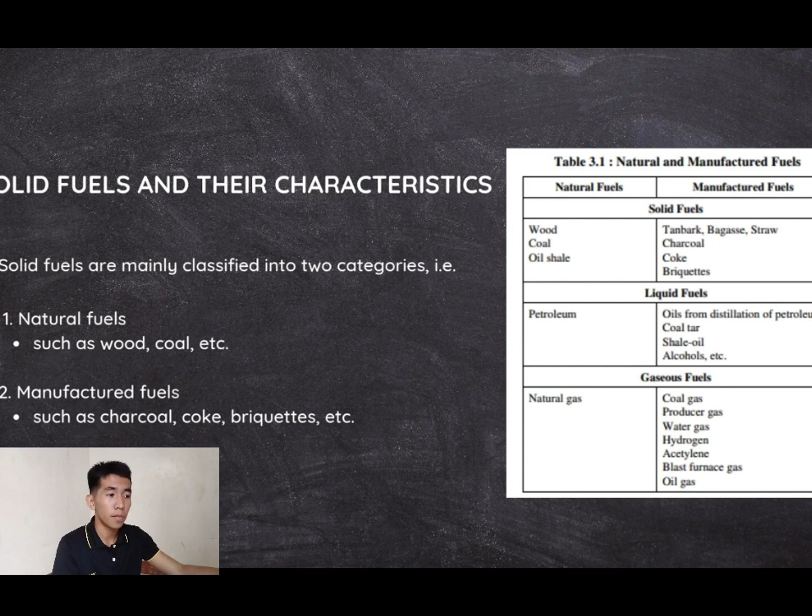This table summarizes the classification of solid fuels based on their origin and physical state. It clearly distinguishes between natural and manufactured fuels and further categorizes them into solid, liquid, and gaseous forms, with examples for each category.

Next are the various advantages and disadvantages of solid fuels. The advantages are: they are easy to transport, convenient to store without risk of spontaneous explosion, their cost of production is low, and they possess a moderate ignition temperature.

In disadvantages: their ash content is high, a large proportion of heat is wasted, they burn with clinker formation, their combustion operation cannot be controlled easily, and their cost of handling is high.

Next, wood and its characteristics. The most commonly used and easily obtainable solid fuel is wood, because wood is very renewable and easy to use.

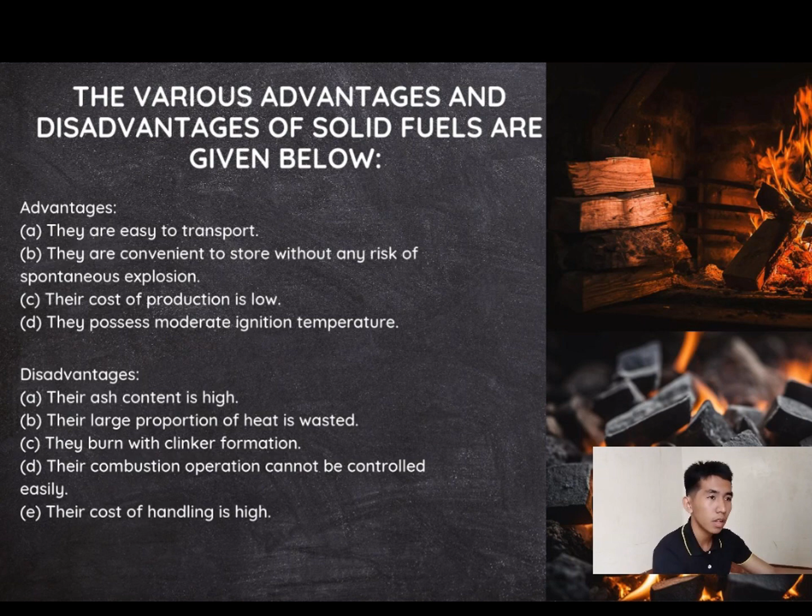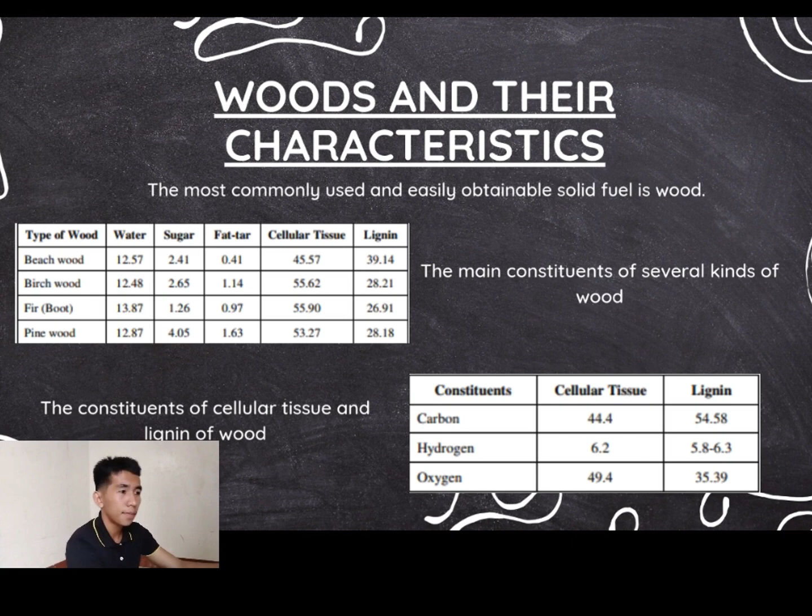This slide presents data on the composition of different types of wood, focusing on water, sugar, fat tar, cellular tissue, and lignin content. It is presented in two tables. In table 1, the composition of various wood types.

This table shows the percentage composition of different constituents in 4 types of wood: beechwood, birchwood, firwood, and pine wood.

In table 2, constituents of cellular tissues and lignin. This table breaks down the main constituents—carbon, hydrogen, and oxygen—within the cellular tissue and lignin components of wood.

It reveals variation in the composition of different wood types. Pine wood, for instance, shows a higher sugar and fat tar content compared to birchwood. The cellular tissue and lignin components are primarily composed of carbon, hydrogen, and oxygen, with lignin having a significantly higher carbon content than cellular tissue. This is useful for understanding the properties and potential applications of different wood types, particularly in relation to their use as fuel.

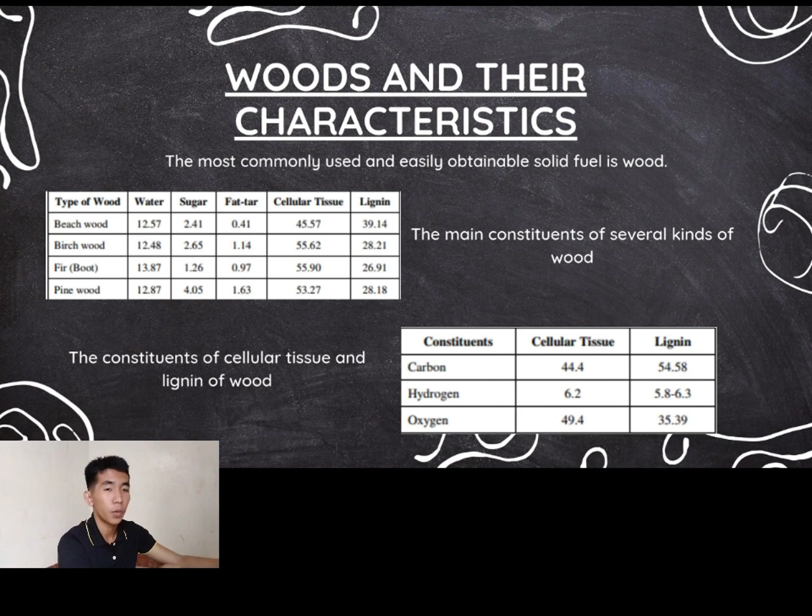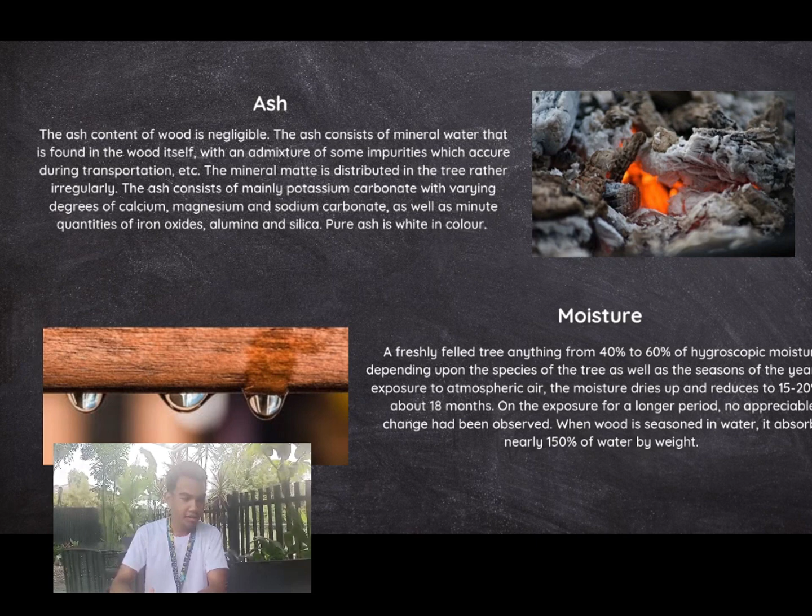Ash. The ash content of wood is negligible. The ash consists of mineral matter that is found in the wood itself, with the admixture of some impurities occurring during transportation, etc. The mineral matter is distributed in the tree rather irregularly.

The ash contains sodium carbonate. It consists mainly of potassium carbonate with varying degrees of calcium, magnesium and sodium carbonate, as well as minute quantities of iron oxide, alumina, and silica. Pure ash is white in color.

Moisture. A freshly felled tree has anything from 40% to 60% of hygroscopic moisture, depending upon the species of the tree as well as the season of the year. On exposure to atmospheric air, the moisture is reduced to 15 to 20% in about 18 months.

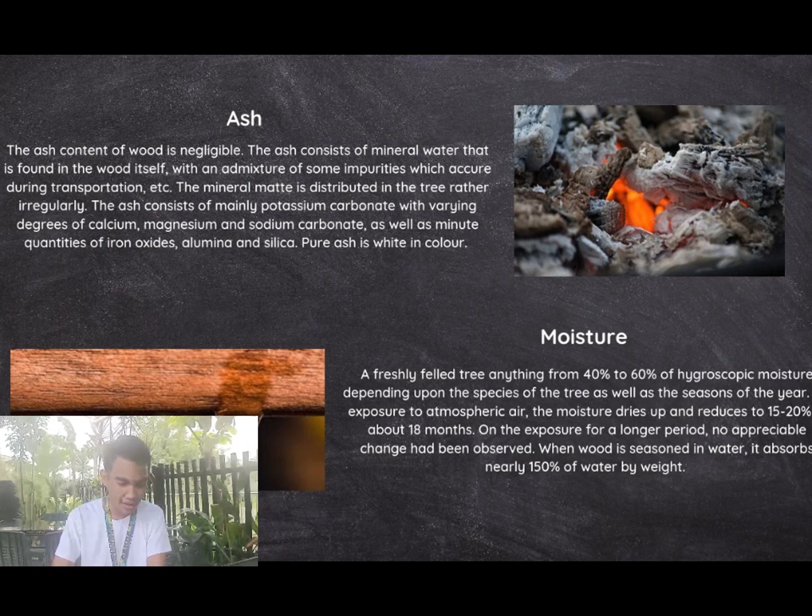When wood is seasoned in water, it absorbs nearly 150% of water by weight.

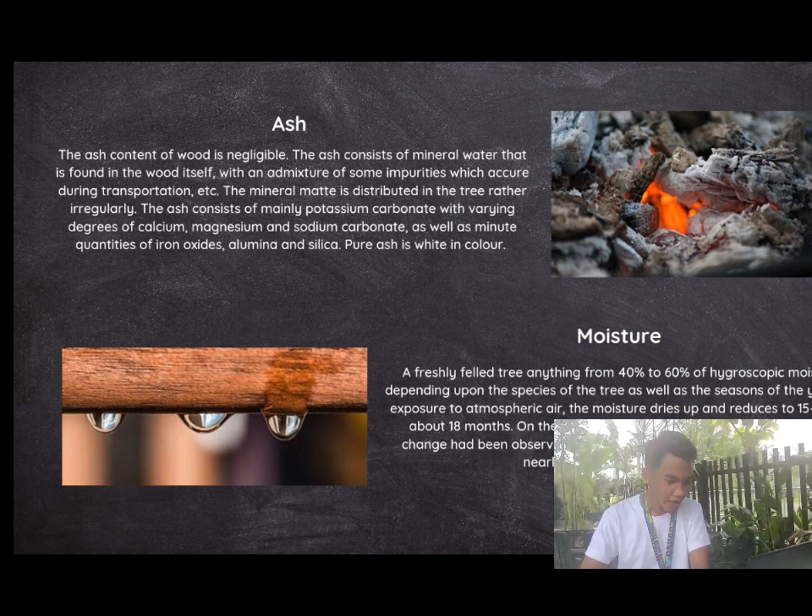Characteristics of flames: the nature of flames depends on the content of wood. Pine and birch contain more tar and resin, burning with a thick and bright flame, while aspen and alder burn with a dim, transparent flame. The light of the flame also depends on the tar content.

Combustion characteristics: the lighter the wood, the more intensely it burns, with a long flame. This is because air penetrates easily throughout the whole piece during combustion. If the wood is heavy and hard, penetration of air remains difficult, and a concentrated flame results, with more heat developing at the point of burning.

Liquid fuels and their characteristics. Liquid fuels can be classified as natural or crude oil, and artificial or manufactured oils.

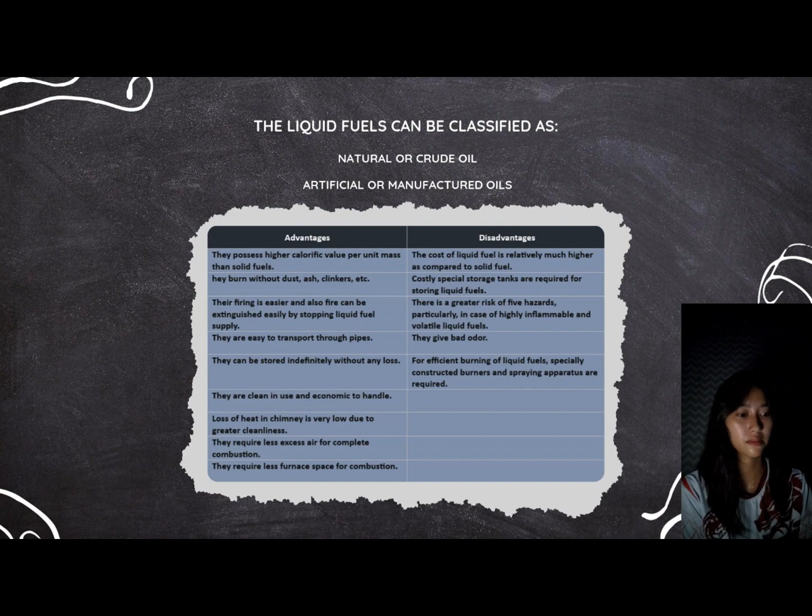Manufactured liquid fuels and their characteristics. Manufactured liquid fuels include gasoline, diesel oil, kerosene, heavy oil, naphtha, lubricating oils, etc. These are obtained mostly by fractional distillation of crude petroleum or liquefaction of coal.

The diesel fuel or gas oil is obtained between 250 to 320°C during the fractional distillation of crude petroleum. This oil generally contains 85% carbon and 12% hydrogen. Its calorific value is about 11,000 kcal per kilogram. The suitability of a diesel fuel is determined by its cetane value.

Diesel fuels consist of longer hydrocarbons and have low values of ash, sediment, water, and sulfur content. The main characteristic of a diesel fuel is that it should easily ignite below compression temperature. The hydrocarbon molecules in a diesel fuel should be, as far as possible, straight chain ones, with a minimum admixture of aromatic and side chain hydrocarbon molecules.

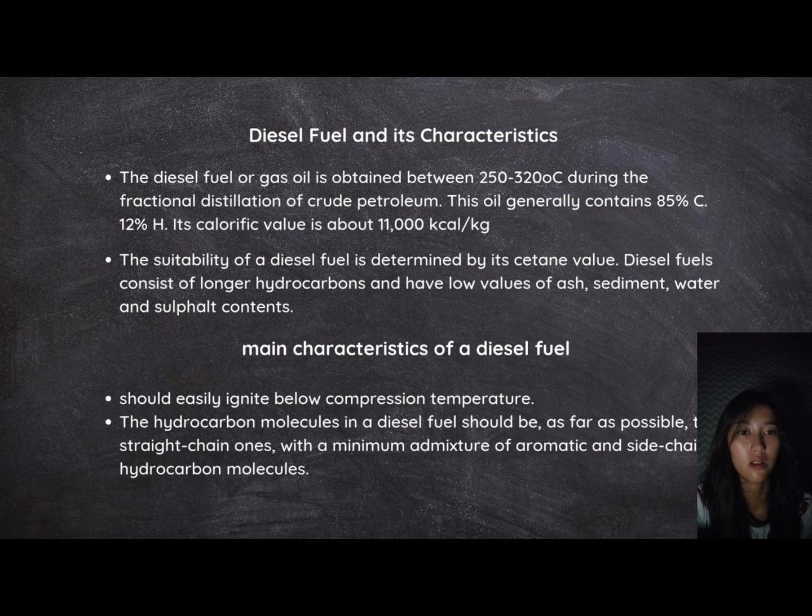Kerosene oil and its characteristics. Kerosene oil is obtained between 180 to 250°C during fractional distillation of crude petroleum. It is used as an illuminant, jet engine fuel, tractor fuel, and for preparing laboratory gas. Used in domestic appliances, it is always vaporized before combustion. By using a fair excess of air, it burns with a smokeless blue flame.

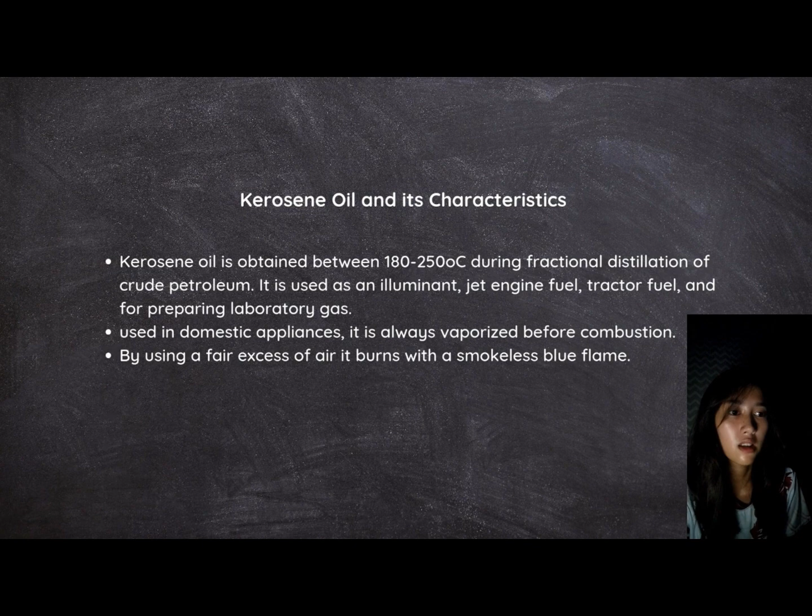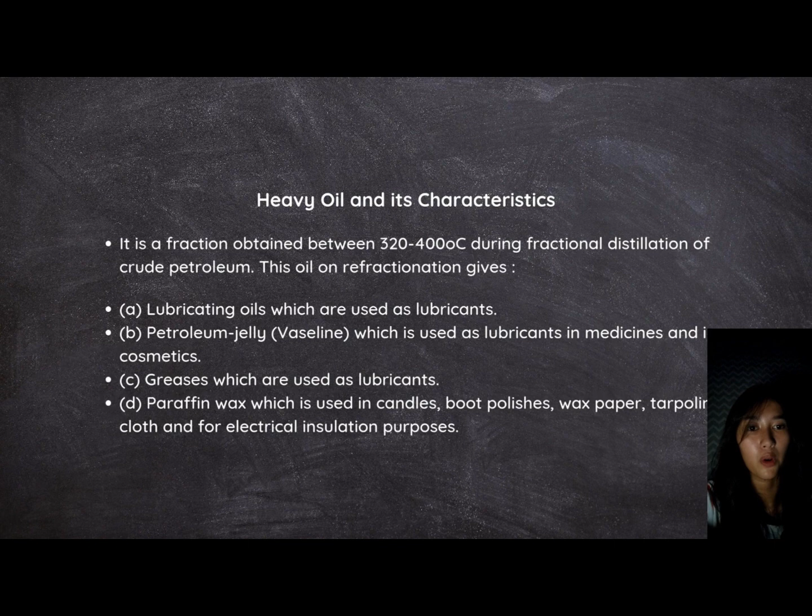Heavy oil and characteristics. It is a fraction obtained between 320 to 400°C during fractional distillation of crude petroleum. This oil, on refractionation, gives lubricating oils, which are used as lubricants; petroleum jelly, which is used as a lubricant, in medicines, and in cosmetics; greases, which are used as lubricants; and paraffin wax, which is used in candles, boot polishes, wax paper, tarpaulin cloth, and for electrical insulation purposes.

Gasoline or petrol and its characteristics. The straight-run gasoline is obtained either from distillation of crude petroleum or by synthesis. It contains some undesirable unsaturated straight-chain hydrocarbons and sulfur compounds. It has a boiling range of 40 to 120°C.

Some of the characteristics of an ideal gasoline are the following: it must be cheap and readily available; it must burn clean and produce no corrosion, etc., on combustion; it should mix readily with air and afford uniform manifold distribution; it must be knock resistant; it should not pre-ignite easily; and lastly, it must have a high calorific value.

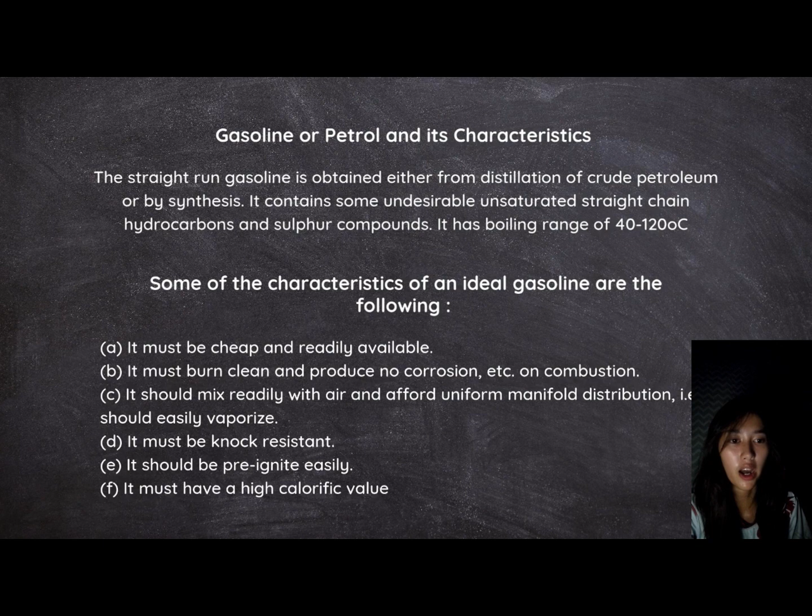From the word gas, gaseous fuels are fuels that is in gas form. An example of gaseous fuel is methane, propane, and butane, which we can see at home, especially when we cook. Mostly these gases are composed of hydrocarbons. Examples of hydrocarbons are methane and propane, which I mentioned earlier, and hydrogen, carbon monoxide, or mixtures thereof.

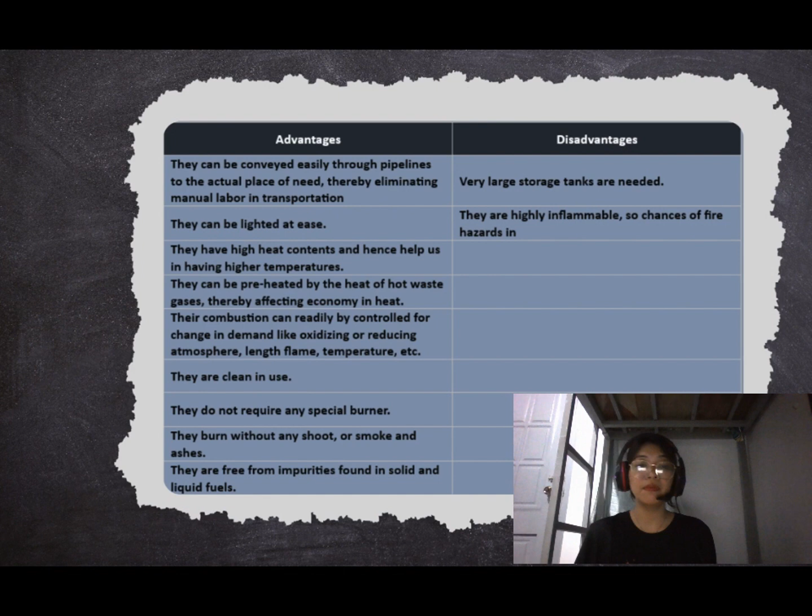Before we proceed to its characteristics, let's tackle its advantages and disadvantages. The first advantage of gaseous fuel is that it can be transferred through pipelines, like a tubo, which makes the transfer process easier.

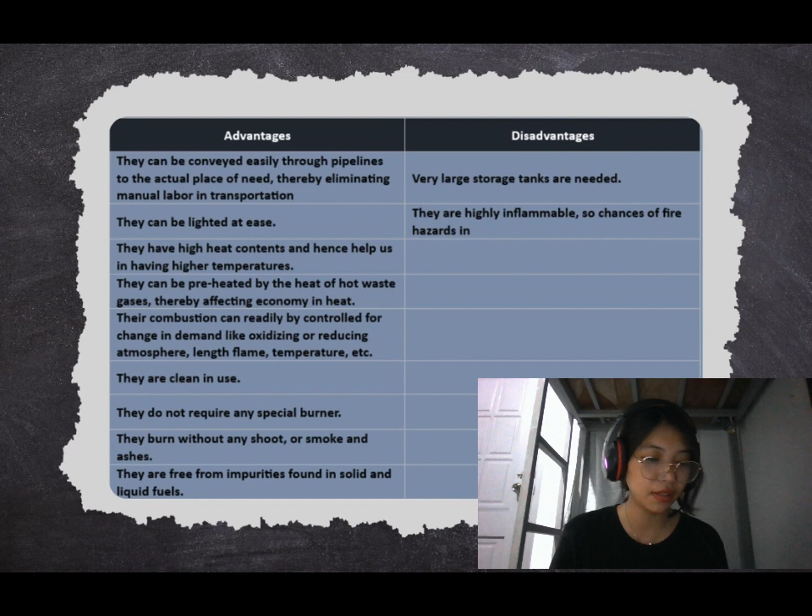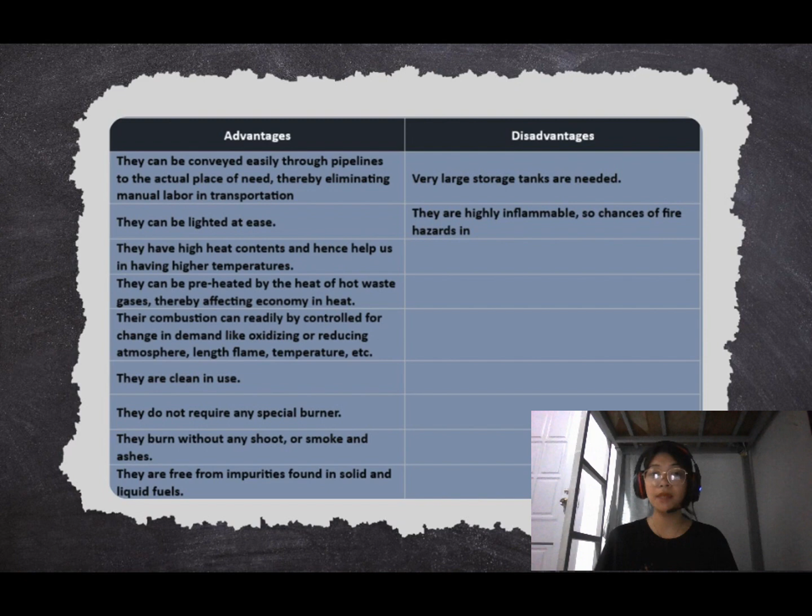The third advantage is that they have high heat content, which helps us have higher temperature. This is very useful especially in cold countries that have winter, since it's very cold there. They need something that adds heat to their body so they don't suffer from the cold. Gaseous fuel can help because it's easy to light up, especially in countries with winter weather, and it emits high temperature heat that helps warm our body when it's cold.

The fourth advantage of using gaseous fuel is that they can be preheated by the heat of hot waste gases, thereby improving heat efficiency. A room filled with gas, when you light it, can explode - because one of its properties is that it's easily preheated by other heat or hot waste. The fifth advantage is that their combustion can readily be controlled for change in demand, like oxidizing or reducing atmosphere length, flame temperature, etc.

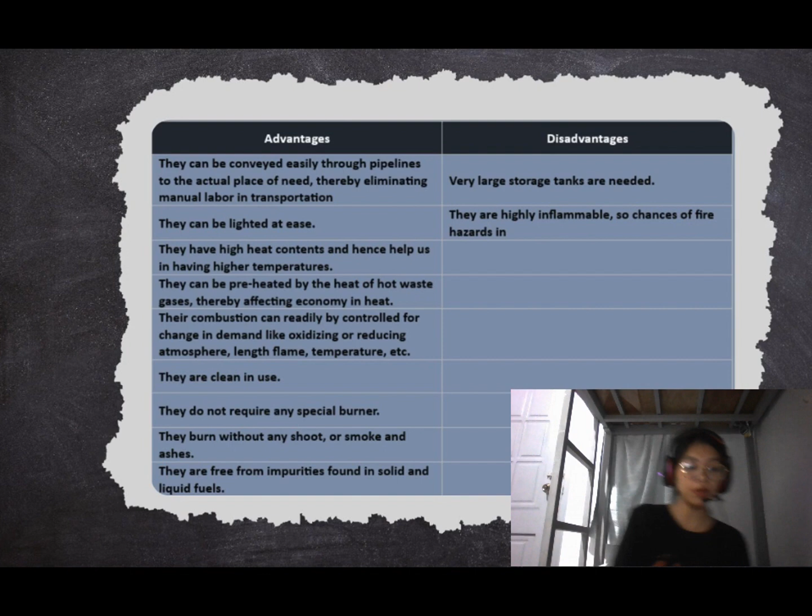And free-flowing. So if there are advantages, of course there are disadvantages. What are the disadvantages of using gaseous fuel?

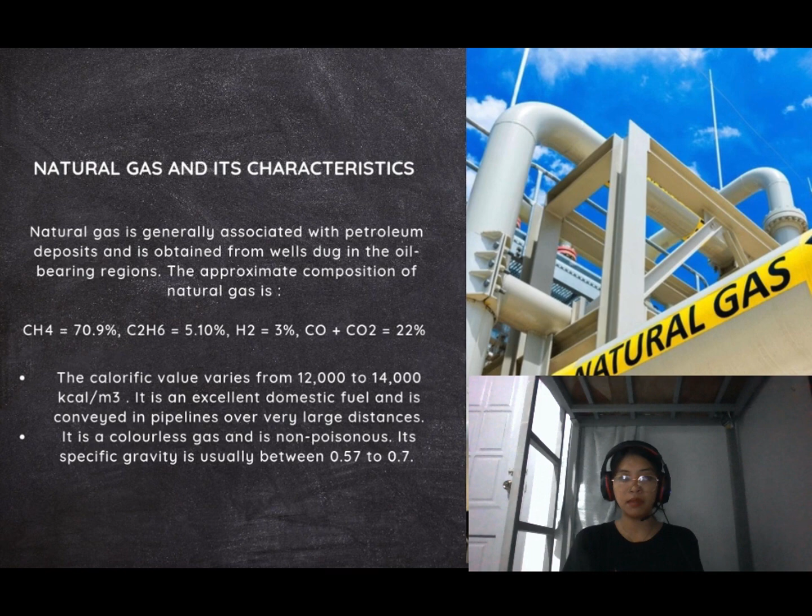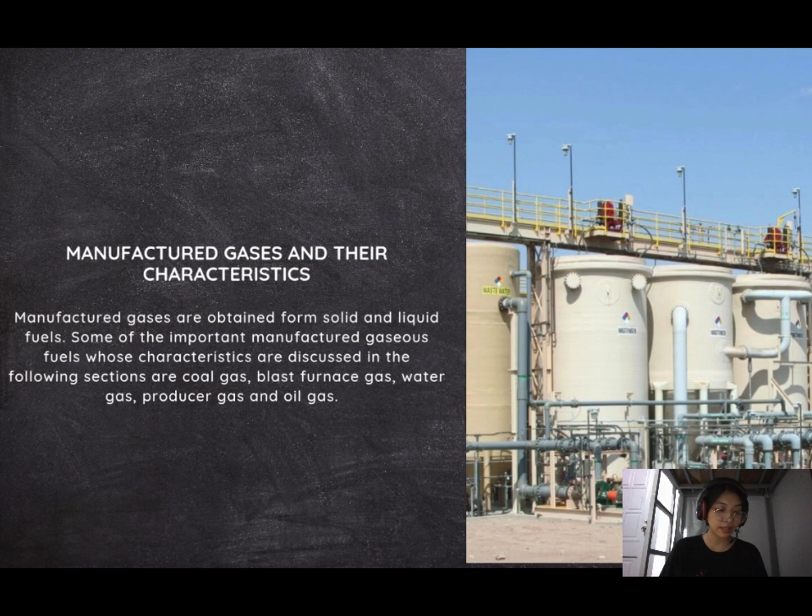Let's go to manufactured gases and their characteristics. So unsa may kuan sa manufactured gases? One example ata sa manufactured gases kay kanang LPG tank, I think. So manufactured gases are obtained from solid and liquid fuels. So manufactured gases kay combination siya ng solid and liquid fuel. And then some of the important manufactured gaseous fuels whose characteristics are discussed in the following sections are coal gas, blast furnace gas, water gas, producer gas, and oil gas.

Let's tackle the coal gas and its characteristics. So coal gas is obtained when coal is carbonized or heated in absence of air at about 1,300 degrees Celsius in either coke ovens or gas making retorts. So na siya specialized na dito siya i-heat aron makaproduce ani na gas. So ang characteristic ani na gas kay it is colorless and then having a characteristic odor. So colorless siya, nga naa siya kuan baho. It is lighter than air and burns with a long smoky flame.

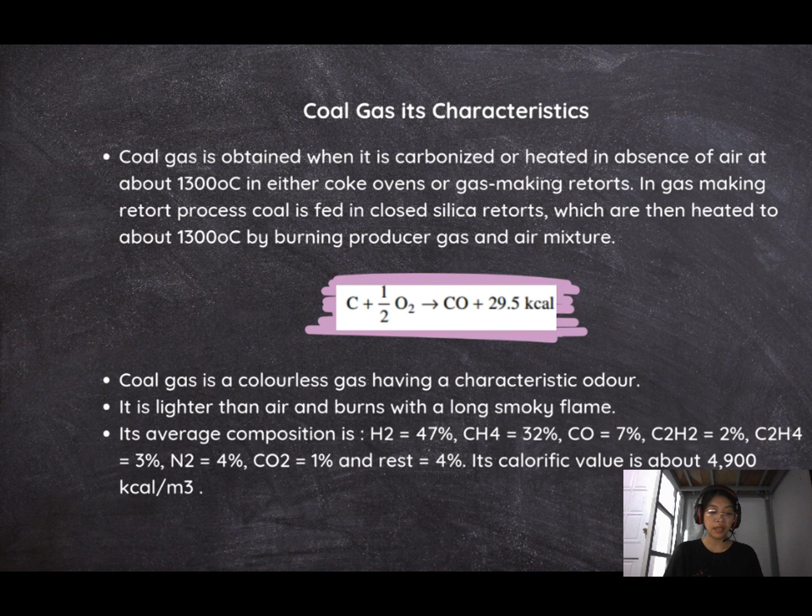Blast furnace gas and its characteristics. It is a byproduct fuel gas obtained during the reduction of iron ore by coke in the blast furnace. Calorific value is about 1000 kilocalories per cubic meter. It contains about 20 to 25% carbon monoxide along with CO2, N2, etc. About one-third of this gas is used for preheating air used in the blast furnace itself, while the remaining two-thirds is available for use in boilers after cleaning, and in gas engines.

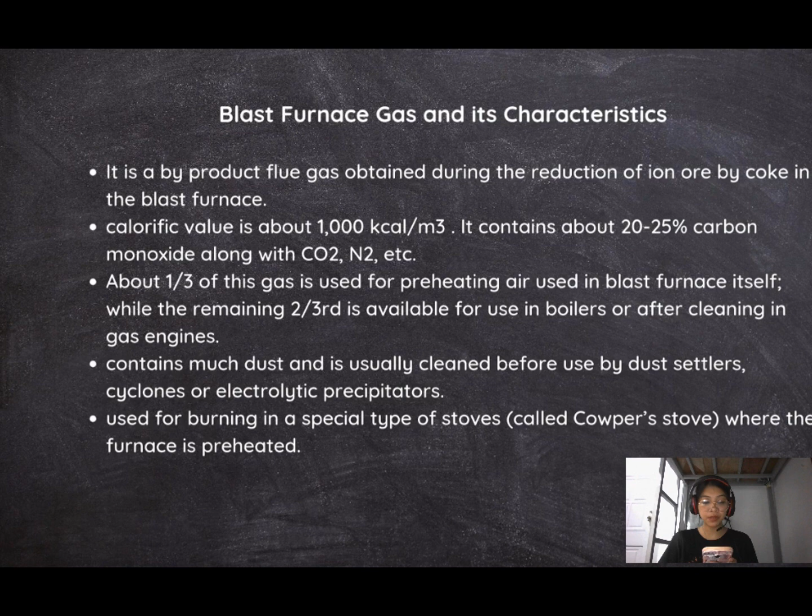Okay, so it contains much dust and is usually cleaned before use by dust settlers, cyclones, or electrolytic precipitators. It is used for burning in special types of stoves called Cowper stoves, where the furnace air is preheated.

Water gas and its characteristics. Water gas is essentially a mixture of combustible gases, CO, and H2, which is hydrogen, with a little fraction of non-combustible gases. It is made by passing alternately steam and a little air through a bed of red-hot coal or coke maintained at about 900 to 1000 degrees Celsius in a reactor, which consists of a steel vessel about 3 meters wide and 4 meters in height. It is lined inside with fire bricks.

It has a cup and cone feeder at the top, and an opening at the top for the exit of water gas. At the base, it is provided with inlet pipes for passing air and steam. Reaction: supplied steam reacts with red-hot coke or coal at 900 to 1000 degrees Celsius.

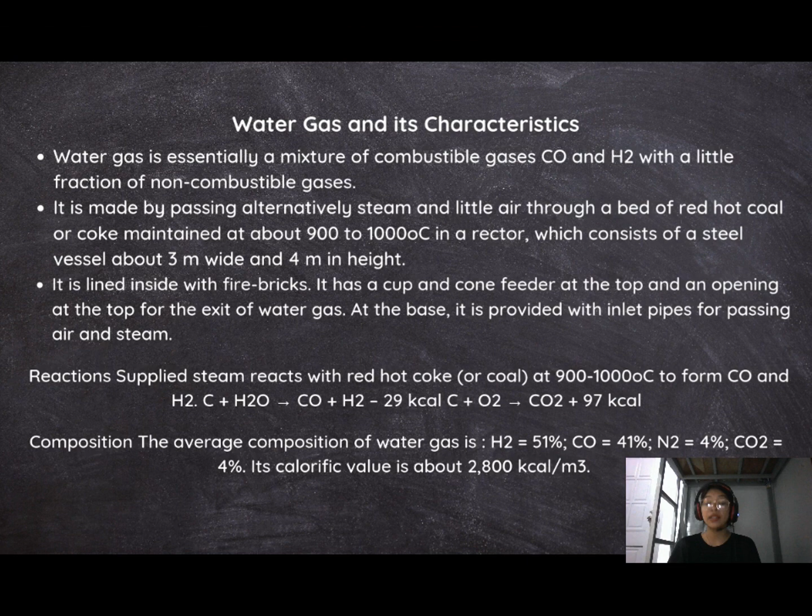Producer gas and its characteristics. Producer gas is essentially a mixture of combustible gases, carbon monoxide and hydrogen, associated with non-combustible gases like N2, CO2, etc. It is prepared by passing air mixed with a little steam over a red-hot coal or coke bed maintained at about 1100 degrees Celsius in a special reactor called a gas producer. These are the reactions in the producer.

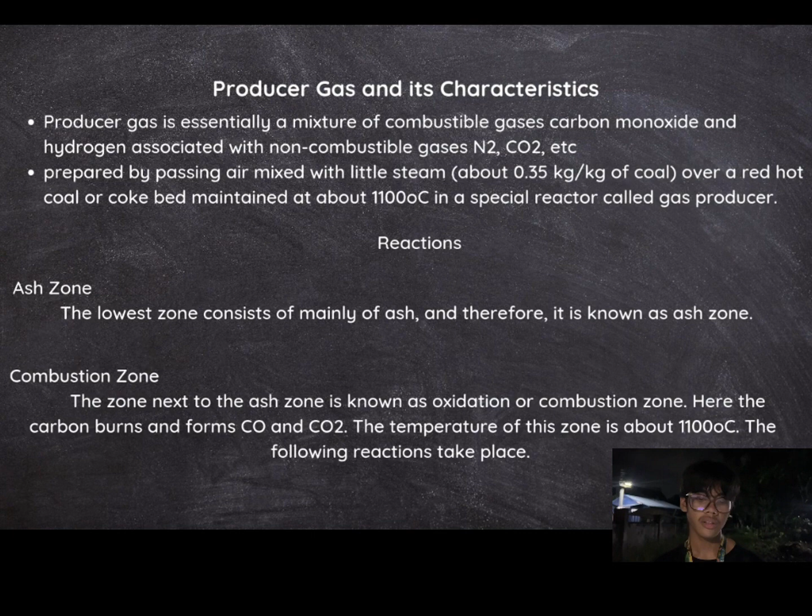Ash zone. It is the lowest zone that contains mainly ashes, and therefore it is known as the ash zone, which is straightforward. The combustion zone. It is the zone that is next to the ash zone, and it is also known as the oxidation zone. Here, the carbon burns and forms CO and CO2. The temperature of this zone is about 1100 degrees Celsius. The following reactions take place. One more reaction.

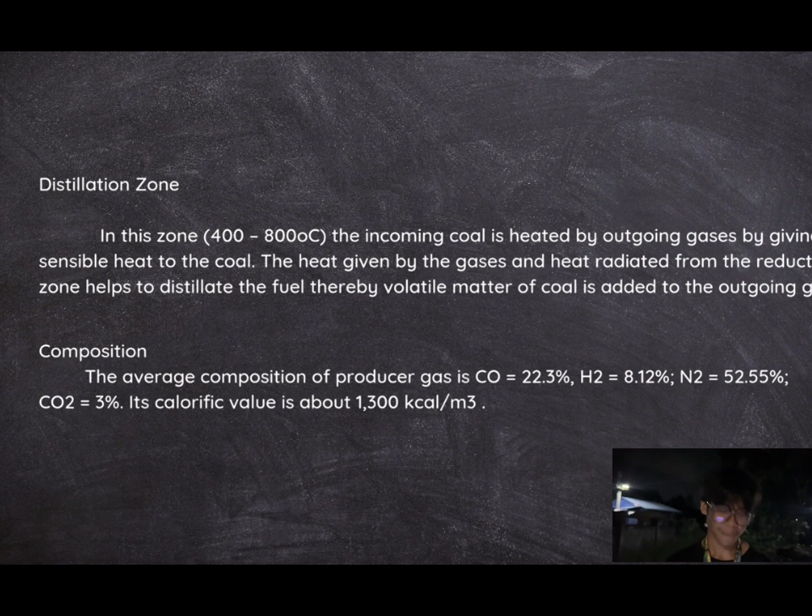Distillation zone. In this zone, at 400 to 800 degrees Celsius, the incoming coal is heated by outgoing gases giving sensible heat to the coal. The heat given by the gases and heat radiated from the reduction zone helps to distill the fuel. Thereby, volatile matter of coal is added to the outgoing gases.

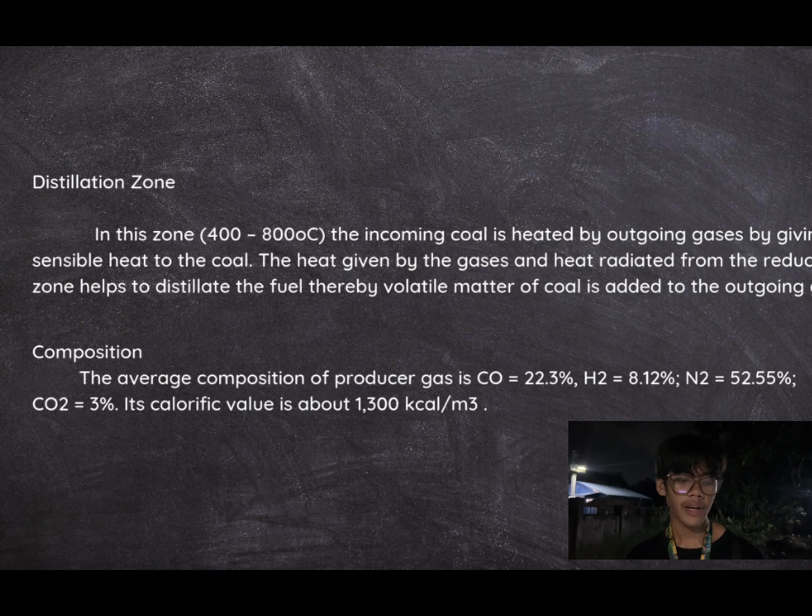Composition. The average composition of producer gas is CO equals 22.3%, H2 equals 8.12%, N2 equals 52.55%, and CO2 equals 3%. Its calorific value is about 1,300 kilocalories per cubic meter.